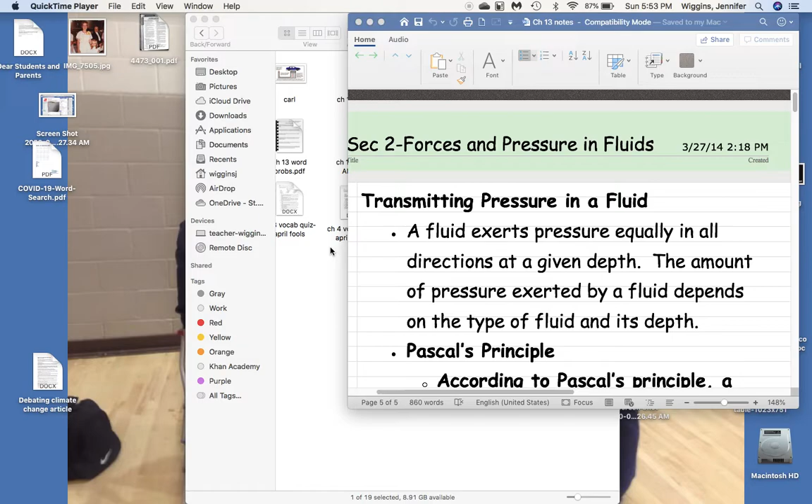Forces and pressure in fluids. So, transmitting pressure in a fluid. Remember, a fluid is anything that's liquid or air, basically. A fluid exerts pressure equally in all directions at a given depth. So this means if you're in a lake, a bathtub, a pool, whatever, at the same depth, the pressure is exerted equally at that given depth. The amount of pressure exerted by a fluid depends on the type of fluid and its depth.

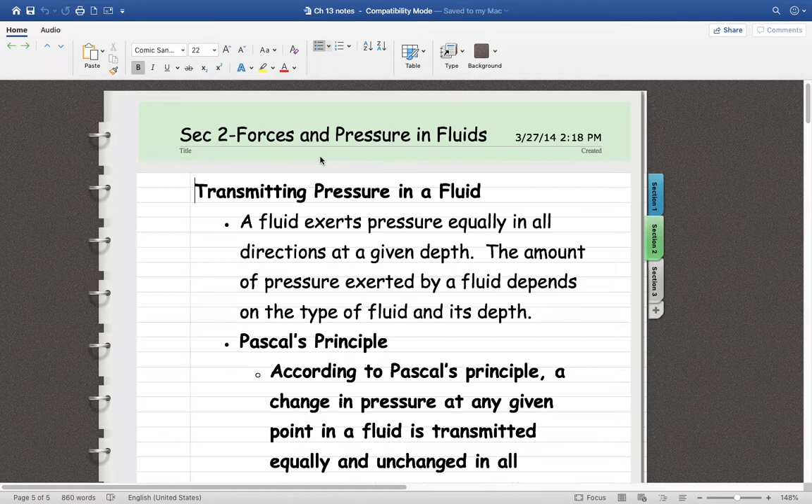So, Pascal's principle. According to Pascal's principle, a change in pressure at any given point in a fluid is transmitted equally and unchanged in all directions throughout the fluid. So please memorize that. I'm going to say that again actually. According to Pascal's principle, a change in pressure at any given point in a fluid is transmitted equally and unchanged in all directions through the fluid.

So what this means, if you have a toothpaste tube and you squeeze it at the bottom, it's being transmitted equally and unchanged throughout the fluid. If you are squeezing a balloon at the very bottom, in the middle, or at the top, it's going to be equally and unchanged throughout the thing. There's even a picture in the book of a 2 liter bottle being squeezed in the middle that shows you where it's all being squeezed.

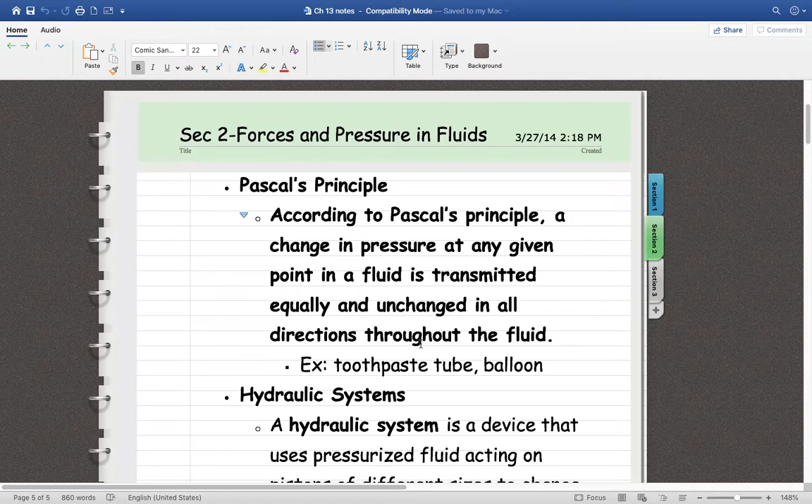So, hydraulic systems. A hydraulic system is like my chair that goes up and down behind my desk. Anything that has pistons. Like when a dump truck empties out the dirt, those are pistons on the side pulling it up. One of those big trucks emptying out a dumpster, like the ones at our school, lifts it up by pistons. If you go to the car repair place and they lift your car up, those are pistons doing that. So that's a hydraulic system.

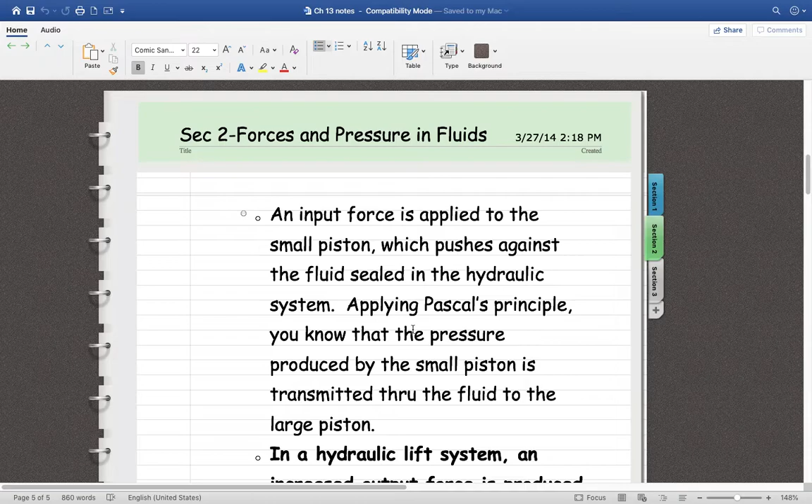A hydraulic system is a device that uses pressurized fluid acting on pistons of different sizes to change a force. So, an input force is applied to the small piston, which pushes against the fluid sealed in the hydraulic system. Applying Pascal's principle, you know that the pressure produced in the small piston is transmitted throughout the fluid to the large piston, equally and unchanged.

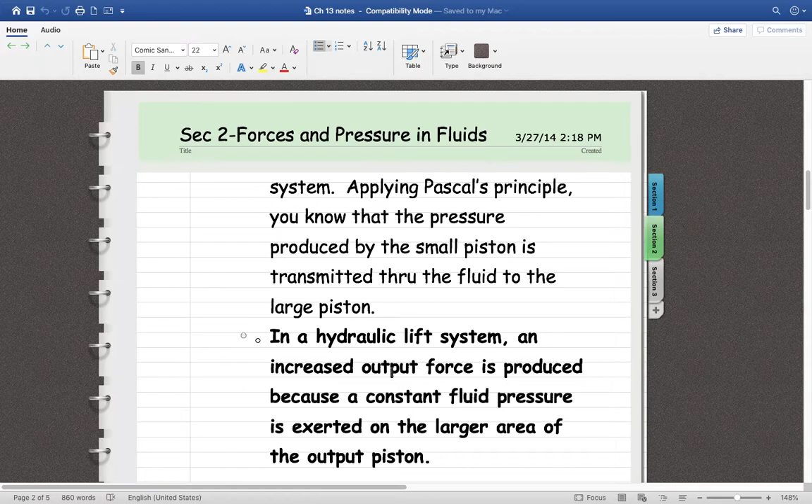This is way easier if I draw this at school, but I can't. So I think there's a picture down here. In a hydraulic lift, you have a big piston and a little piston, and because of the different sizes, it can lift up a big dumpster or whatever. In a hydraulic lift, an increased output force is produced because a constant fluid pressure is exerted on a larger area of the output piston.

I think we went through this earlier when we did chapter 3. I can't remember though. Sometimes I put it in there and sometimes I don't.

Okay. So I like to think of this as like a hose. When you are using your hose and you're just letting it flow, it's not very strong. But if you put your thumb over some of it, doesn't the water come out stronger? This is kind of the same theory.

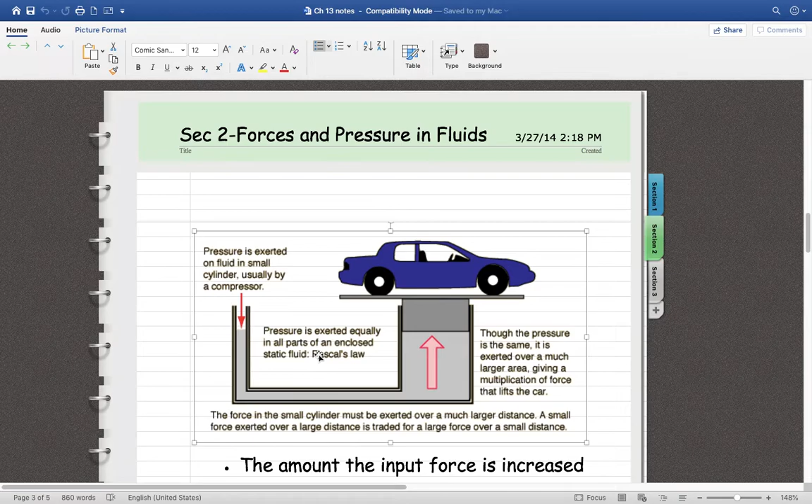Okay, so there's like a compressor and you push the button and it goes, and so it pushes down and goes, and it pushes it all the way through, and then when it gets here it goes, and it pushes up something big. It's kind of like a toothpaste tube that's kind of clogged. My son leaves the cap off all the time, and it's always clogged. So you have to squeeze really hard, and then when it gets unclogged, the toothpaste goes whoosh right across the mirror and everywhere else and wastes it all. That's what this is kind of like.

Okay, so pressure is exerted equally and in all parts of the enclosed static fluid. Static fluid means fluid that's not moving. Okay, so because it's small here, you're doing so much force, and then when it gets here, it's like whoosh. Okay, so the force in the small cylinder must be exerted over a much larger distance from here to here. A small force exerted over a large distance is traded for a large force over a small distance.

Okay? Though the pressure is the same, because remember Pascal said it's equally and unchanged throughout, it is exerted over a much larger area giving the multiplication of force that lifts the car. So what is able to lift this big car is that this is so small right here, and this is so big.

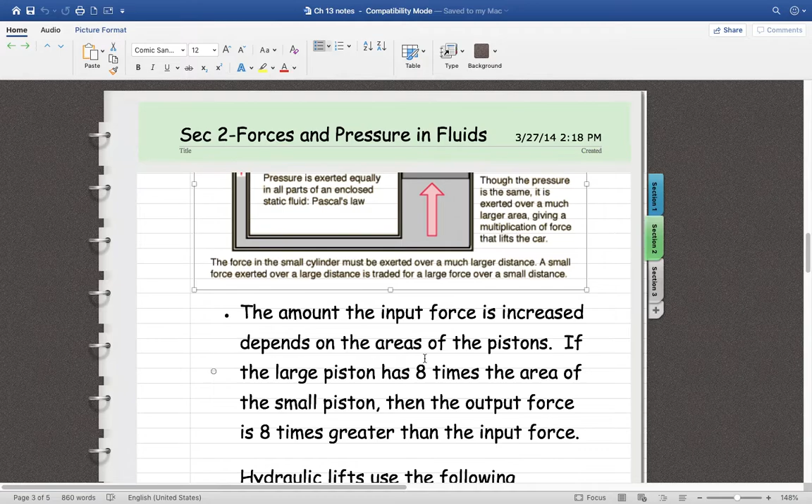Okay. So the amount the input force is increased depends on the areas of the pistons. Area of the piston is here and here. Okay? So the amount the input force is increased depends on this. So if this was my chair at work, okay, I only have to push the thing up and then it can basically lift me up. Okay? So because of the difference.

Okay? And this is like, again, you're squeezing your toothpaste tube through this little small hole because it's clogged, and then all of a sudden it opens up and it shoots up really fast. That's the same kind of thing. So if the large piston has 8 times the area of the small piston, the output force is 8 times greater than the input force.

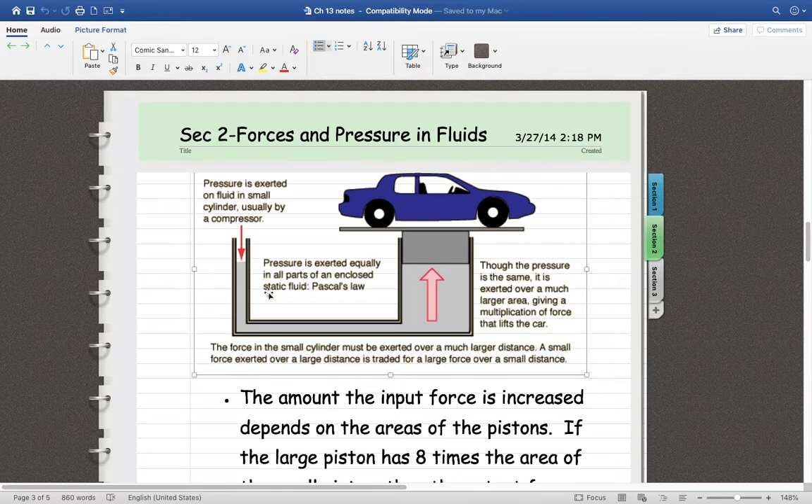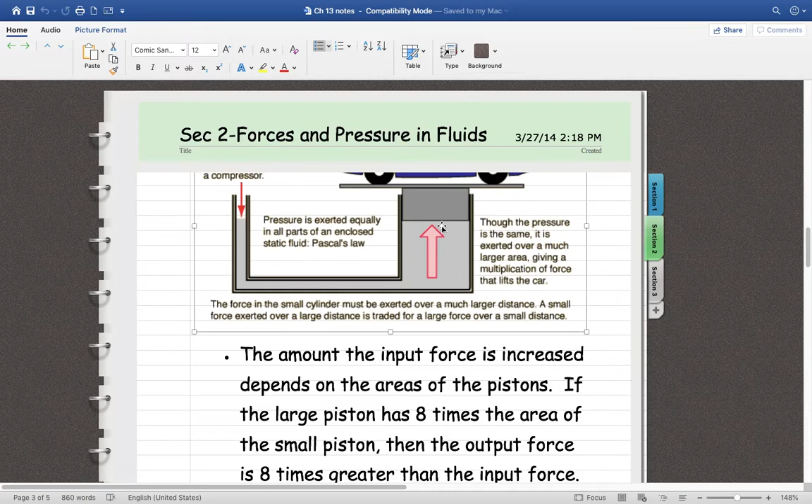Input force is going to be what you input, so it's here. I'm pushing in the button usually, or start the compressor or whatever, and then the output force is this going up. Okay? So let's say that this is 8 times bigger than this. It means that it has 8 times more output force. Because it's small, the output force is 8 times greater than the input force. Okay? So this is the formula we're going to use.

Hydraulic lifts use the following formula. Pressure 1 equals pressure 2, because remember Pascal's principle says that pressure in the fluid is exerted equally and unchanged throughout the entire hydraulic machine. So P1 and P2 are the same, but what's different is the areas and the force. Okay, so here's the formula: F1 over A1 equals F2 over A2. F over A is pressure 1, and then F over A is pressure 2, okay?

So if there's anything in the math problems that talks about two pistons, you're going to use this formula here, okay? So you just got to make sure that this is the input force, this is the input area, output force, output area. Okay? All right.